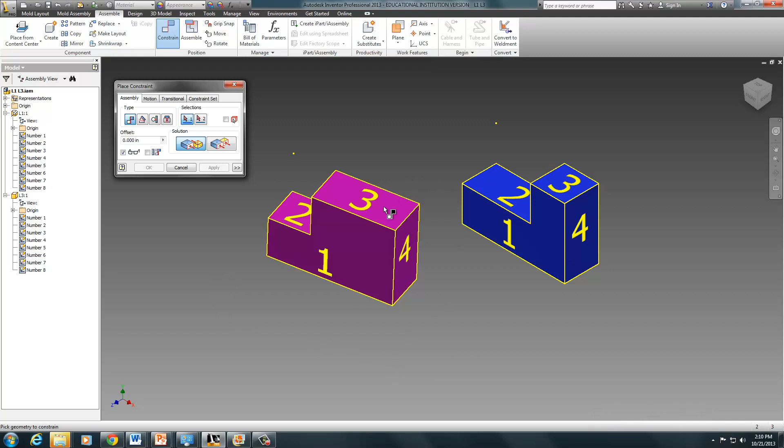So let's see if we can make some sense of this. The first thing I'm going to do is go up to constraint, and I'm going to first do a mate constraint. I hover over mate here and click it, and hit the faces I want to constrain. So the first one I want to do, I'll just do 3 and 2. Apply. Okay, that makes sense enough.

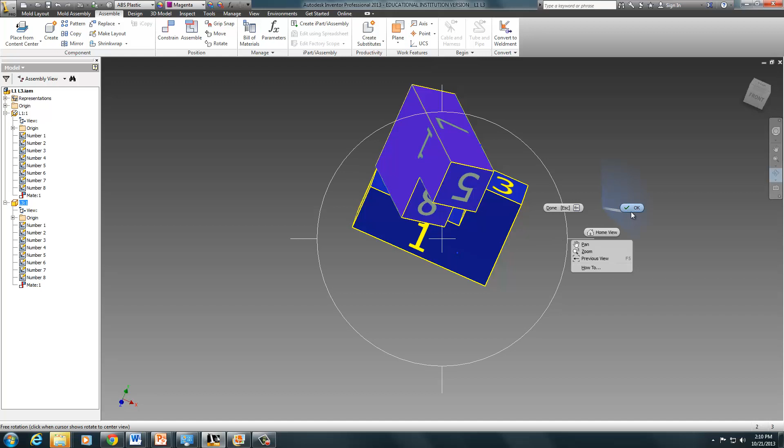Now sometimes you can get some wacky results even though Inventor is behaving correctly, but it will just appear wacky because of some subtle things. At least that's my experience.

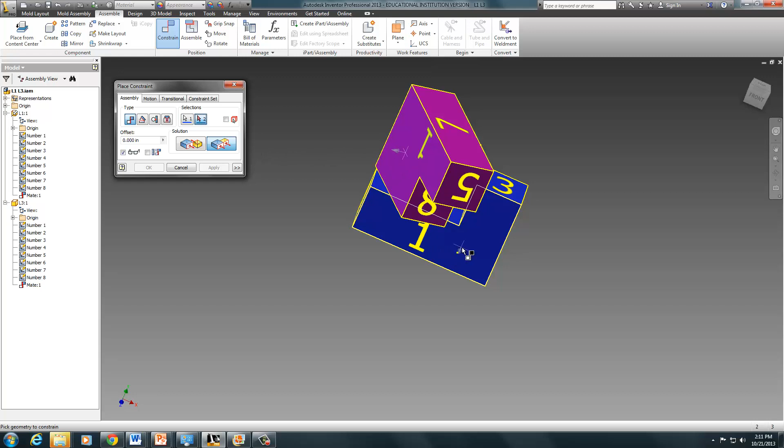So what I'm going to do now is give a shot at making my next step, making the sides 1 and 1 flush with each other. I go back up to constraint. This time I don't choose mate, I hover here and you can see that's flush. So I'm going to click on each of these faces. Apply. Okay, that looks pretty good.

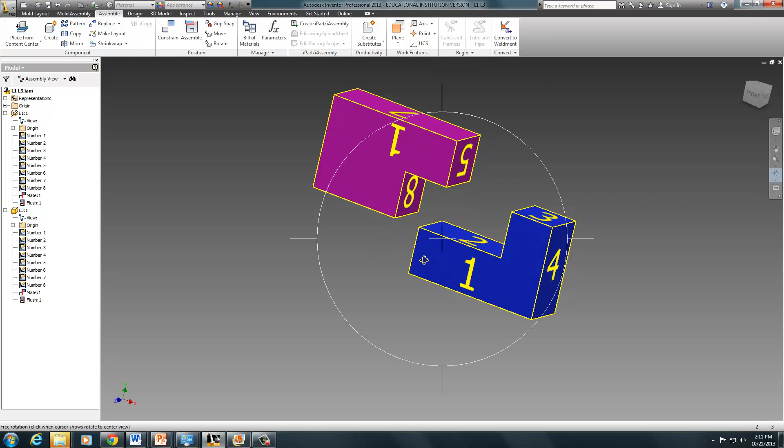Now I've got things such that there's a degree of freedom here, so I guess what I'm going to do is make face 8 on the pink one mate with face 8 on the blue one. So let's give that a try.

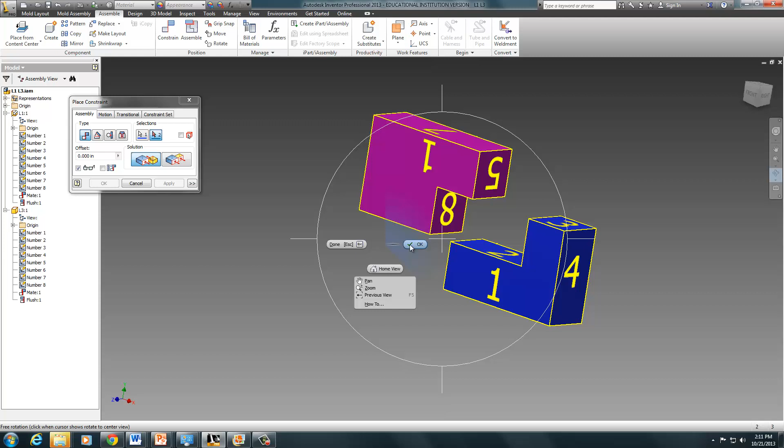So back to constrain we go. Mate. So there's that one. And to get at the other one, I need to go back to my rotational tool here, move around this way, right click OK to get out of that, and then finally hit that guy. Apply. Okay, I think that is put together.

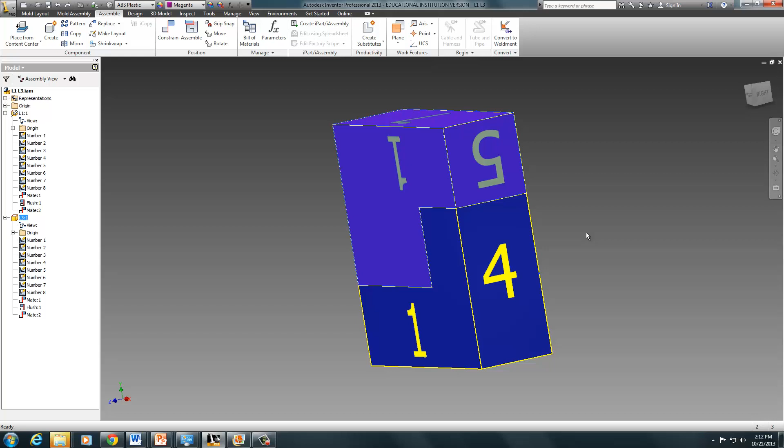This shows how to constrain parts using the mate and flush steps. And you can see that this thing won't move at all. It's fully constrained and it's put together. So that's an example of how you can get some shapes associated with our puzzle cube to be put together using the flush and mate constraints.